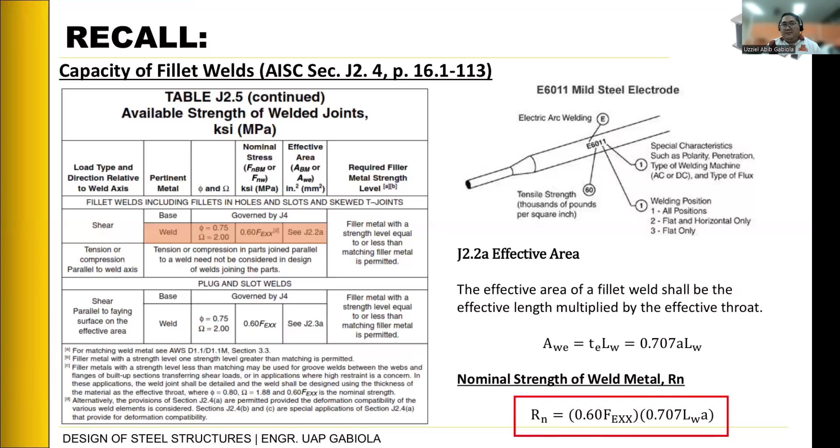Aside from our weld metal capacity, we also need to calculate the base metal capacity. That will be based on two types of limit state: shear yielding and shear rupture, depending on the connected section. So what we look at here is the workpiece that we are connecting to another workpiece.

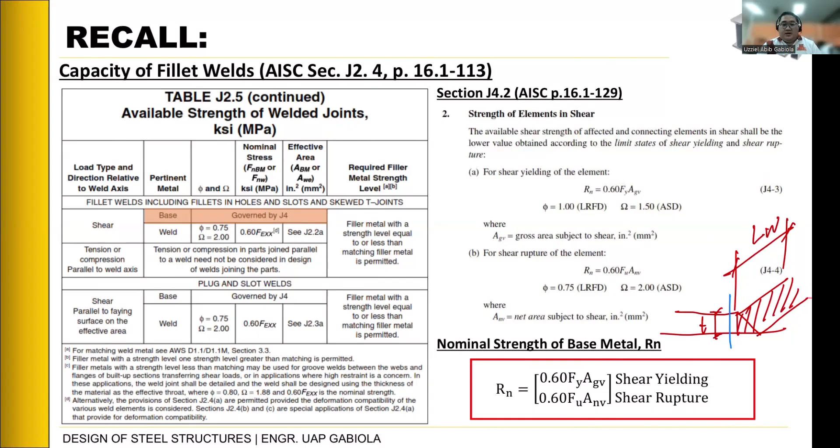Next, after we get the capacity or analyze the section, we also check the limitations for our welding sizes. So we have minimum and maximum weld sizes. As we mentioned, we have minimum weld sizes because of the heat effect, the heat sink effect.

Nangyayari dun sa melted electrode natin na kapag hindi natin sinunod yung minimum, pwedeng halimbawa hindi pa natin na-place ng maayos, tumitigas na agad yung mismong molten electrode natin. So, imbis na dapat maging siyang part of the connection, nagiging slag siya.

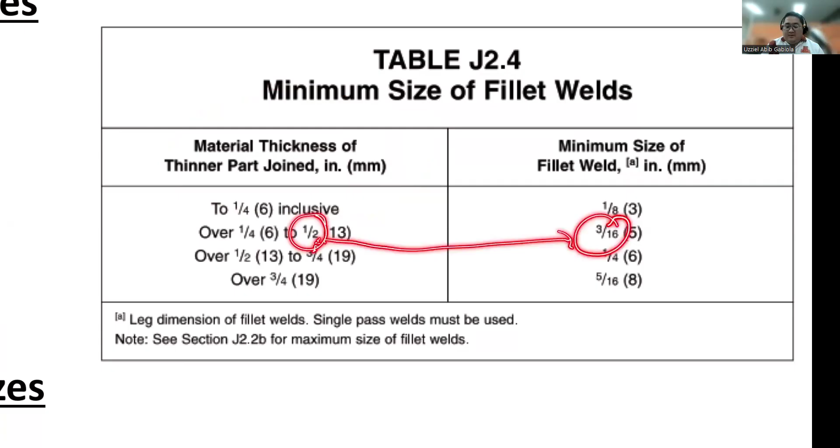Kaya kailangan kunin natin dito sa values ng minimum ng table. Ang kailangan lang natin gawin, identify lang natin kung ano yung thickness ng member, ng workpiece na gusto natin i-connect. Halimbawa, we have 1/2 inch na thickness ng plate, dito siya pumasok. So, ang minimum niya will be 3/16 inch na fillet weld.

At then, for maximum weld sizes, depende pa din sa thickness ng plate natin. Unang mong titingnan is it greater than or less than sa 1/4 inch? Kapag less than, as is na siya, kung ano yung value ng thickness.

Kasi ito yung sinasabi natin last time na kapag less than siya dun sa 1/4 thick, hindi masyado nagmamatter yung niya, kahit sumobra ng konti yung weld natin umapaw ng konti. Pero kapag halimbawa sobrang kapal nung medyo makapal yung plate natin, and hindi tayo naglagay ng clearance na 2 mm o 1/16 inch, anong nangyayari minsan, natutunaw yung portion na to, nade-deform na yung mismong section natin. Yun yung ayaw natin mangyari kasi magiging iba na yung distribution nung force dun sa area na yon.

So baka yun pa yung mag-cause ng tearing o ng shearing dun sa mismong base material natin. Once we satisfy this minimum and maximum weld sizes, okay na yan. Mas straightforward siya compared with the bolted connection na design, o yung analysis ng design ng bolted connection.

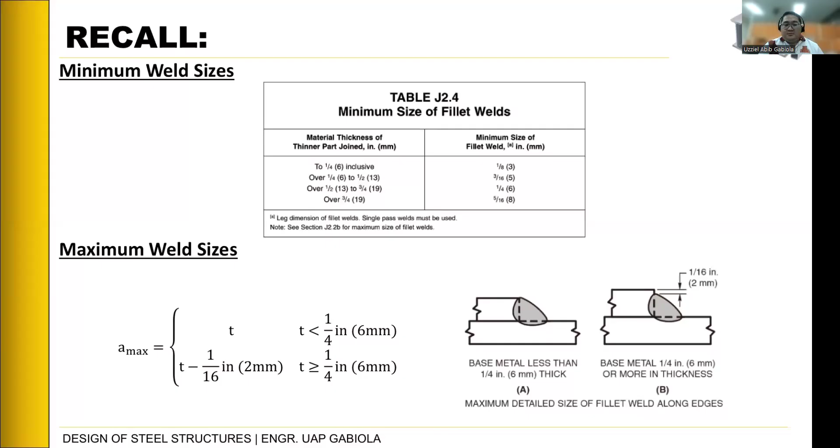So today, punta tayo ngayon sa procedures on how to design yung welded connection natin. As our practice last time, we follow a set of procedures para hindi tayo nawawala dun sa process, kung ano yung sunod-sunod na gagawin natin para makuha natin yung required design ng welded connection.

At of course, since this is a design, meron tayong applied loadings dun sa connection natin, and yun yung kailangan natin i-resist. Kaya in starting the procedure for design, ang unang gagawin natin is to determine yung factored load natin, o yung applied loading natin. So for PU, PU siya kapag LRFD. So kapag ASD ang pinapagamit, that will be yung service load lang, so add lang as is.

At then after natin makuha yung ating ultimate loading, number 2 is to choose a weld size based on weld limitation. Meron tayong limitation natin ng A minimum, tsaka yung A maximum. Ngayon, ang goal natin sa step number 2 is to calculate yung value nitong dalawa. At pag nakuha natin yung value na yun, tsaka tayo magsa-select ng value ng thickness ng weld natin.

Isang note lang na kailangan natin matandaan, the larger yung weld size natin, pag lumalaki daw yung weld size natin, mas umiikli yung weld length natin and do na achieve yung economy ng sa weld connection. Siyempre, kapag halimbawa mas makapal yung welding, mas sufficient yung capacity kaya niyang i-provide, mas larger yung capacity niyang i-provide. Pero it doesn't mean na mas makapal pala, mas mabuti na sobrang kapal na yung gagawin natin.

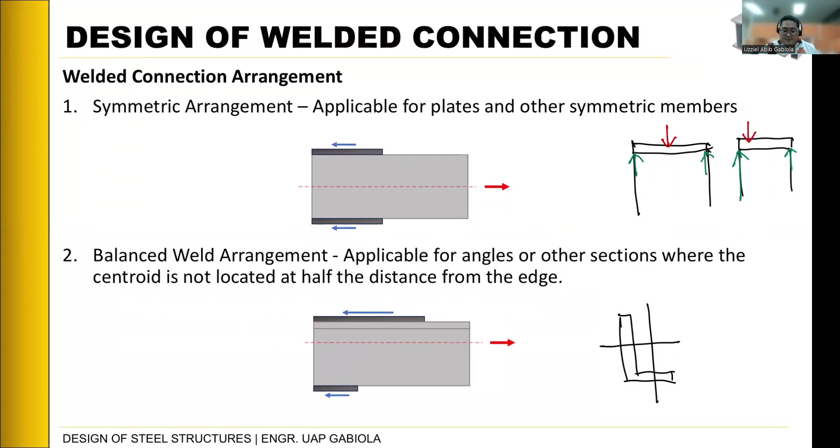So to better understand the steps we indicated, and how this welded connection is applied, let's have an example. We are tasked to design a fillet weld to resist a service dead load of 15 kips and a service live load of 40 kips in our connection.

Use E70 electrodes. Our steel plate is A572 grade 50. And the gusset plate, where the steel plate is attached, is assumed to have adequate capacity, so we neglect checking for the gusset plate. Given that case, we will now calculate it step by step.

According to step 1, we need to determine our factored load. For step number 1, PU equals 1.2 PD plus 1.6 PL. So we have 1.2 times 15 kips plus 1.6 times 40 kips. PU equals 1.2(15) plus 1.6(40), that is 82 kips. That's our step 1.

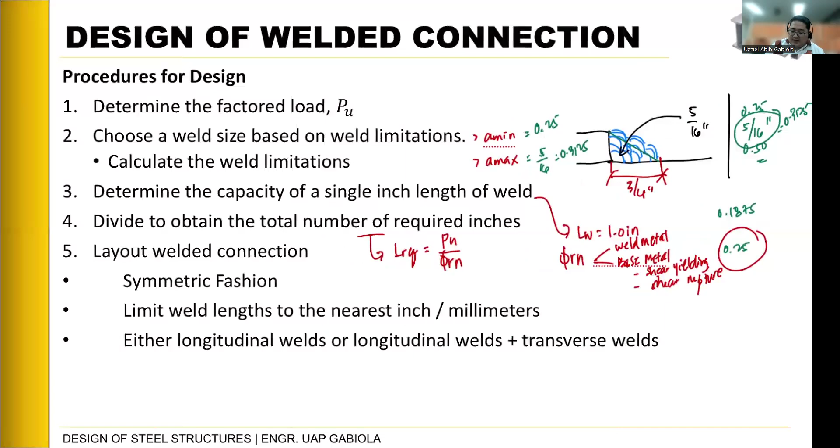Next, for step number 2: choose a weld size based on the weld limitation. So we calculate our A min and A max. A min and A max are based on the thickness of our plate.

Looking at the thickness of our plate, it's 3/8 inch. Let's put that aside. Thickness of the plate is 3/8 inch. Looking at our table, for thickness of material, 3/8 equals 0.375. And 1/2 is 0.5. So that means 0.25 to 0.5 range, 3/8 falls in there.

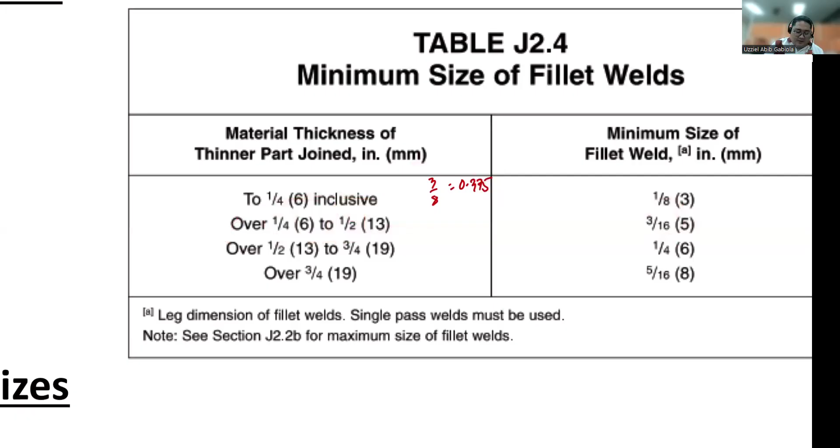So it means 3/16 is our minimum weld size. This will be 3/16.

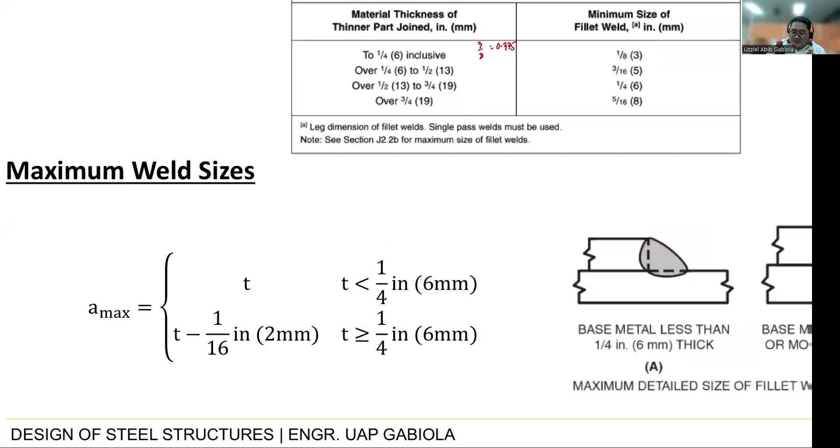And then for A max, we need to check if the thickness of our plate is less than or greater than 1/4. Since it's 0.375, it's greater than 1/4, so what we do is T minus 1/16.

So T minus 1/16, that is 3/8, the thickness of the plate, minus 1/16 equals 5/16 inch. So between 3/16 and 5/16, we need the maximum, which is up to 5/16 inch only. So therefore, use A equals 5/16 inch.

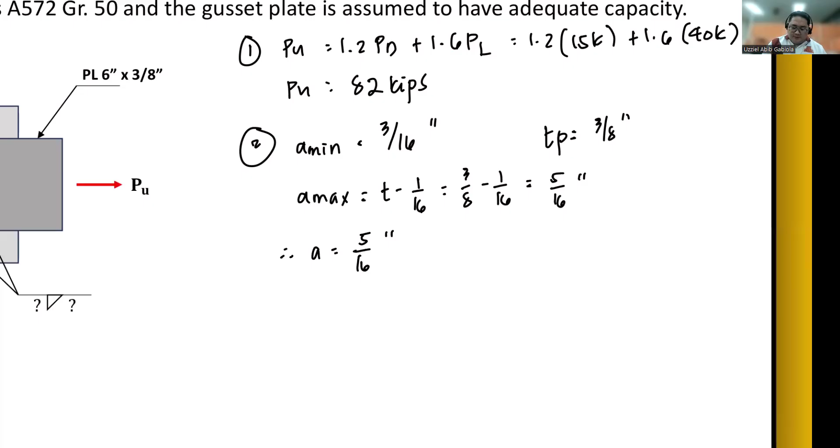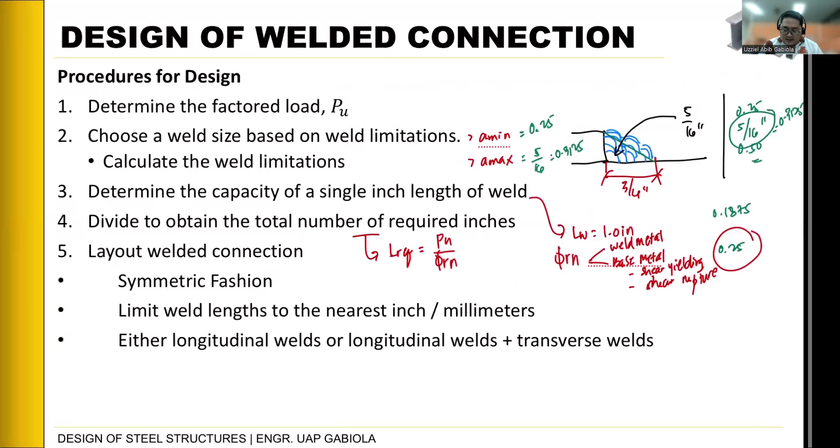Next, number 3: determine the weld capacity for a single inch of length of weld. For number 3, we have LW equals 1 inch, but we base it on our capacities. First, 3A, we need the weld capacity - weld metal capacity.

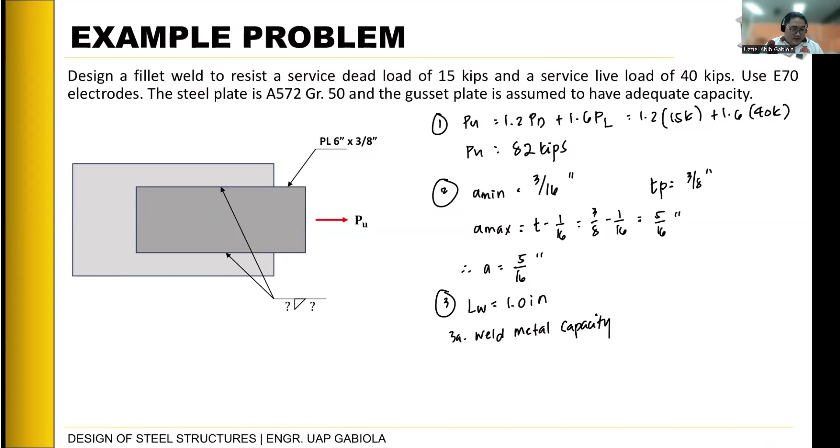Okay, so weld metal capacity, so ang formula natin. Since we use PU sa number 1, LRFD na lang yung gamitin natin. So for LRFD, that is phi Rn.

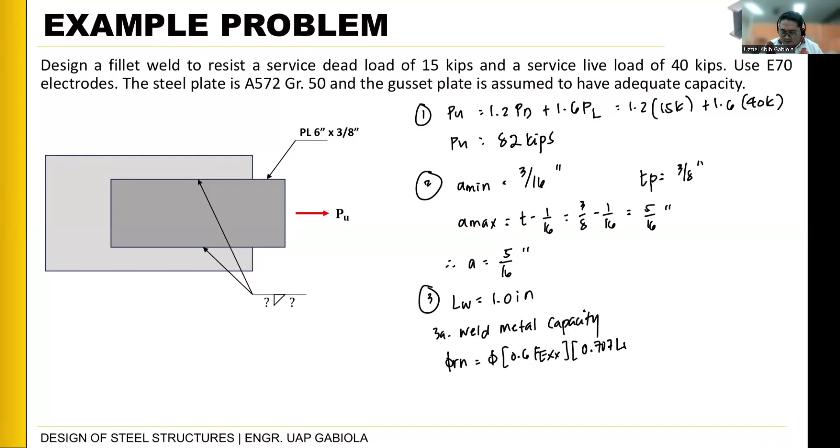So that is phi times 0.6 FEXX times 0.707 LW A. Yung phi natin is 0.75, times 0.6. Yung FEXX, since E70 electrode, that is 70 KSI. So this is 70, times 0.707, length of weld is 1.0, and yung value ng A we calculated is 5/16. So ang phi Rn natin is 0.75 times 0.6 times 70 times 0.707 times 1 times 5/16.

So we have 6.96 kips. This is the capacity, pero since per inch yung length, lalagay natin per inch. That is the weld capacity based on weld metal.

Next, punta tayo dun sa base metal capacity, step 3B. May dalawa tayo: shear yielding and shear rupture. Formula for shear yielding, phi Rn is equals to phi times 0.6 Fy multiplied by AGV.

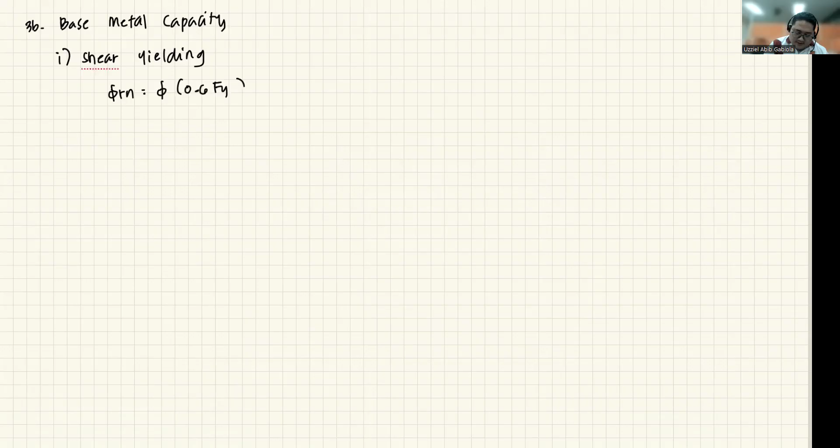Ngayon titingnan natin kung ano yung AGV natin. AGV again is just yung length ng weld natin times yung thickness ng plate. That is 1.0 kasi per inch tayo, per inch ng length. Times yung thickness ng plate, sabi natin kanina that is 3/8 inch. So AGV natin is 3/8 inches squared.

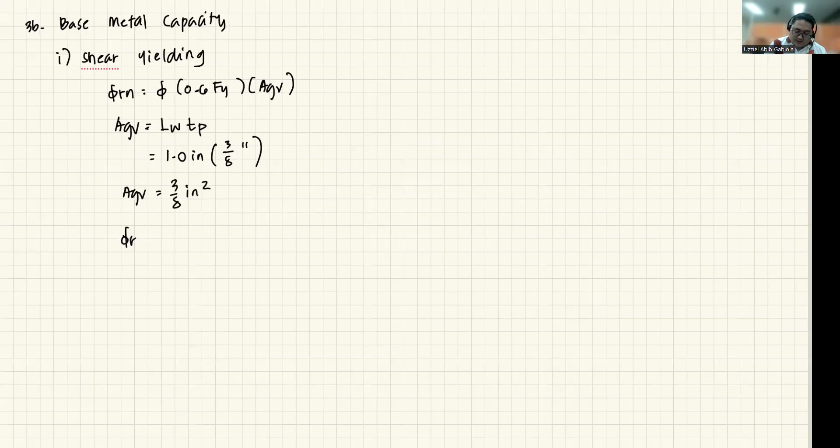So ang phi Rn natin, for yielding, phi is 1.0, times 0.6. For A572, ang FY natin is 50 KSI, FU is 65 KSI. So that is 50 times 3/8. phi Rn, so we have 1 times 0.6 times 50 times 3/8, that is 11.25 kip per inch.

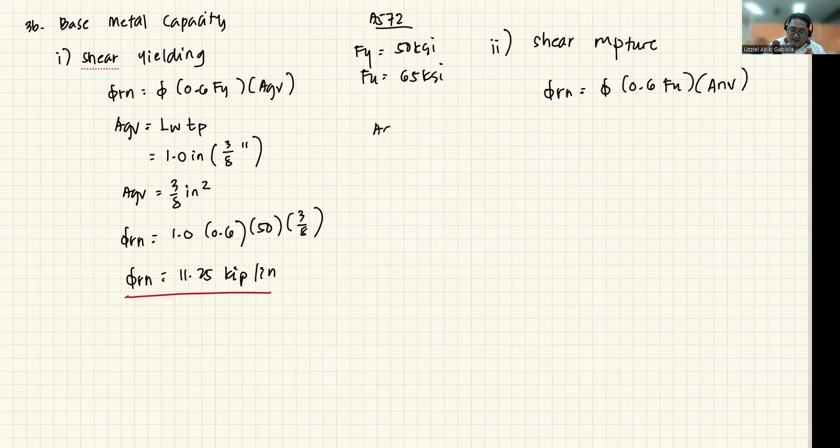Okay, so this is for shear yielding. Next is for shear rupture. Ito natin lagay, shear rupture tayo. For shear rupture VRN is equals to phi 0.6 FU times Anv. Since welded connection tayo, AGV is equals to Anv. So this is 0.75 times 0.6, FU is 65.

We have 3/8. So VRN, 0.75 times 0.6 times 65 times 3/8, that is equivalent to 10.97 kips per inch. So yan yung tatlong value ng capacities natin.

At again, ko-compare natin sila with each other. So ang magiging mag-govern is itong 6.96. So governing VRN is equals to 6.96 kip per inch. Okay, that is for step 3.

Okay, now for step 4, balik tayo dun sa steps natin. For step 4, divide to obtain the total number of required inches. So step 4 is kunin natin yung length required, that is equivalent to PU over yung VRN natin.

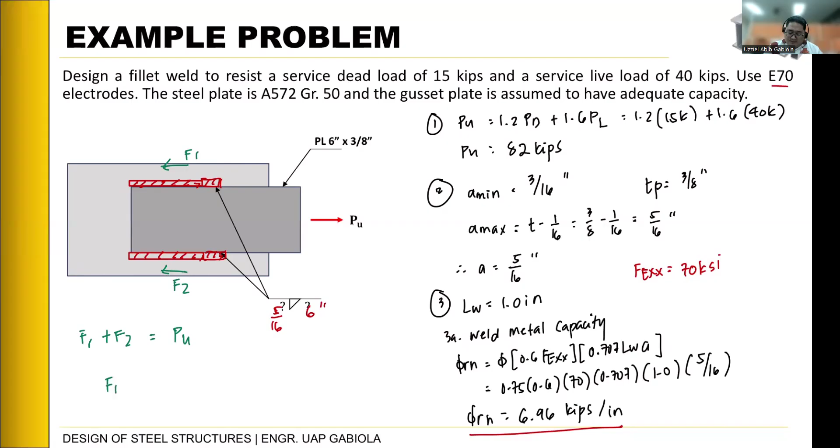Para makuha yung F1, gagawin mo lang yung VRN mo, multiply mo lang dun sa actual length mo. So yung 6.96 kip per inch, multiplied mo ng 6 inch. That is 6.96 times 6, that is 41.76. So ito times 2 natin para maging F1 at F2. Times 2, that is 83.52 kips, which is greater than dun sa PU natin.

Na 82. So pwede din natin i-check yung efficiency ng connection natin. So that is 82 over 83.52, that is 98.18%. Okay, so that is for example number 1.

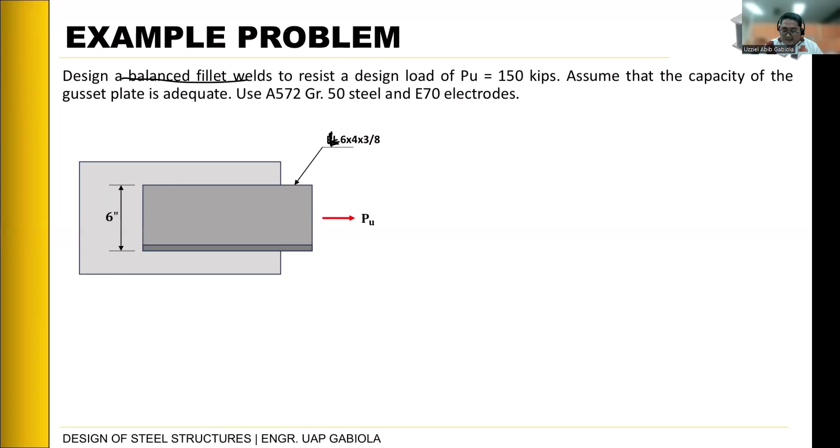Pwedeng mag-balance tayo. So first step, yung PU natin since given, that is already satisfied. Step 2, A minimum and A maximum. Ano yung thickness nung angle bar natin? That is 3/8, parehas nung kanina, ang thickness. So ibig sabihin, yung A min at A max natin will be the same din. So ano yung value kanina? 3/16.

T minus 1 over 16. So that is 3/8 minus 1 over 16 equals 5 over 16 inch. So therefore, use tayo ng A is equals to 5/16.

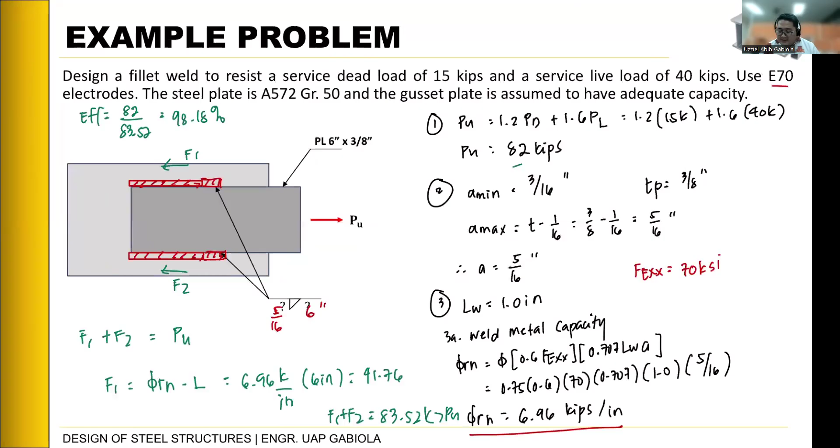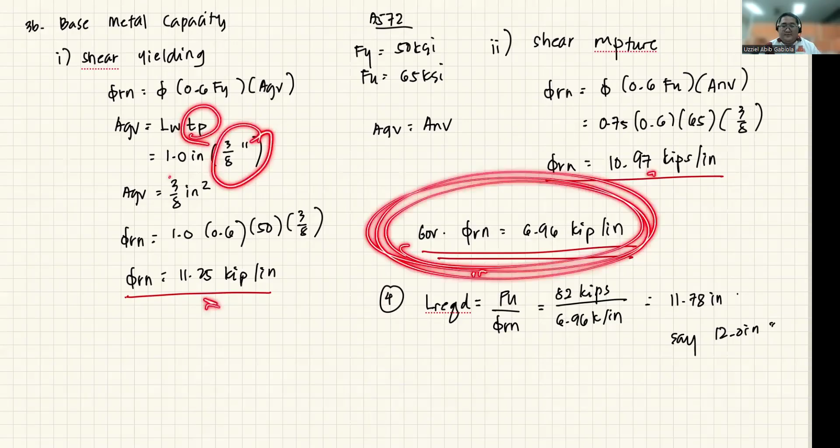For number 3, since same yung mga conditions natin, nagkataon lang po dito sa given natin para mapabilis, for weld metal capacity, the value will be the same. Actually, sa lahat, kasi parehas naman tayo ng thickness na ginamit. So mag-govern pa din itong PRN natin. Di ko na isusulat, pero governing PRN is 6.96 kip per inch.

Para mapabilis lang yung solution natin, number 4 na tayo agad. Ang goal natin is malaman ngayon kung ano yung magiging length, or yung magiging itsura ng mismong connection natin. Pwede natin kunin yung required length is equals dun sa PU over yung governing nating VRN. So that is 150 kips all over 6.96 kip per inch. 150 divided 6.96, that is 21.55 inches.

Say 22 inches ngayon. So ngayon, paano mo idi-distribute yung 22 inches dun sa connection mo dito? Ang pwede natin gawin, we can consider yung combination ng longitudinal weld tsaka transverse weld. Ibig sabihin, magwe-weld tayo somewhere dito, dito, tsaka dito.

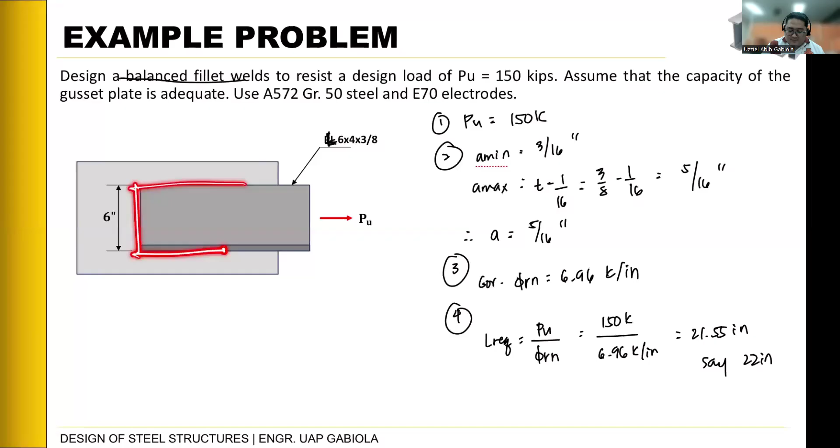Pero tingnan muna natin yung itsura ng section natin. Yung section natin, pag tingnan natin sa side view, nakaganito po yung mismong angle bars natin. And yung loading natin na P, ito yung kanyang direction.

Kailangan malaman natin yung mas magandang atake dun sa mismong ano natin. So lagay natin halimbawa, ito yon yung section natin. Ibig sabihin, kung maglalagay tayo ng weld dito, alam natin na pwedeng yun na yung width niya, ibig sabihin kung ano yung lapad niya. Ito, madaling malalaman natin, 6 inch agad to, yung sa transverse niya. Ibig sabihin, sa 22, magagamit na agad natin yung 6 inches.

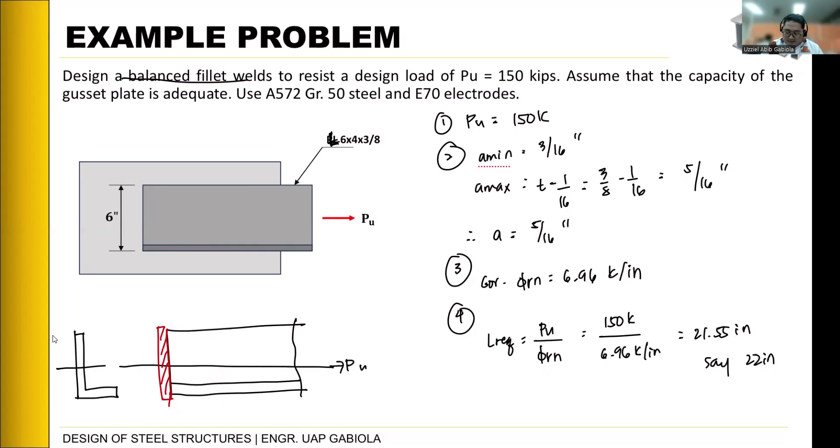Next, dito sa section natin, saan ba mas malapit yung centroid nung naka-apply yung P? Di ba mas malapit siya dito sa bottom portion natin? Ibig sabihin, itong side na to, ito yung kailangan mas mahaba yung connection, yung length ng connection compared dito sa taas niya. Kung dito yun, dapat mas mahaba yung welding mo dito kaysa dito sa taas, kasi dito sa centroid natin, mas nai-stress siya. Kailangan niyang mas malaki yung pang-oppose niyang value ng force para maiwasan magkaroon ng bending or eccentricity, kasi ayaw natin umikot yung connection natin o maging eccentric yung loading natin.

Ibig sabihin, pag drawing natin, pwedeng halimbawa ito yung itsura ng welding, exaggerated po ito ha. Ayan, and then ito yung itsura ng welding dito, medyo maikli. Kung i-compare natin, ito is meron siyang force, tawagin natin F1. Itong isa, meron siyang force din, F2. And then ito, meron siyang force na F3.

Yung F1, F2, and F3, lahat sila magtutulong-tulong para i-resist si PU. Ibig sabihin, ito, distance nito is yung half niya, which is 3 inches. Itong distance ni F1 is yung mula sa bottom, that is 6 inches. And then yung F3, wala siyang distance. Ngayon, ano tong distance na to dun sa PU natin? Ang gagawin natin, titingnan natin yung table natin.

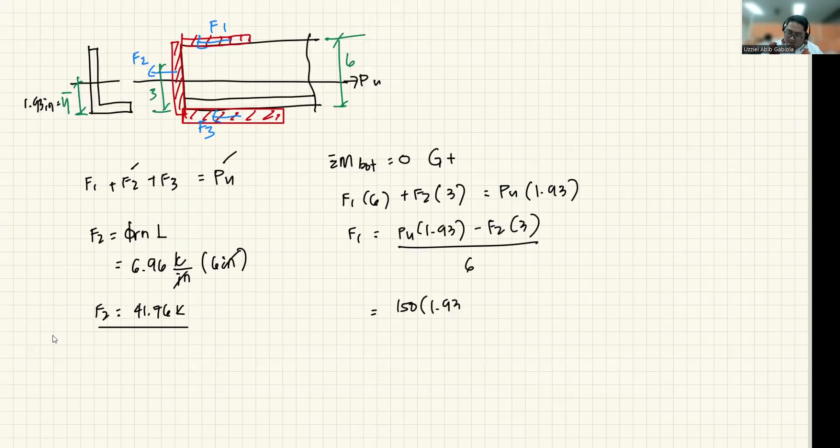Since F2 and PU has a value, makukuha natin si F1 is equals to PU times 1.93 minus F2 times 3, all over 6. So PU natin is 150 times 1.93 minus 41.76 times 3, divide 6. So F1, that is 150 times 1.93 minus 41.76 times 3 divide 6, that is 27.37 kips. Meron na tayong value nun.

Next is to get yung value ng F3. To get that, gagamitin na lang natin tong equation na to: F3 is equals to PU minus F1 minus F2. So that is 150 minus 27.37 minus 41.96. So F3 is equals to 150 minus, that is 80.67 kips.

Kung may value na tayo ng forces, one way to get yung length is to use again yung same formula, rearrange lang natin. So kailangan natin yung length. Halimbawa si L1, gagawin lang natin yung ating force na F1, i-divide natin ng phi Rn. So 27.37 kips divide natin ng phi Rn natin na 6.96 kip per inch, magka-cancel yung kip. L1 is equals to 3.93 inch, or say 4 inches.